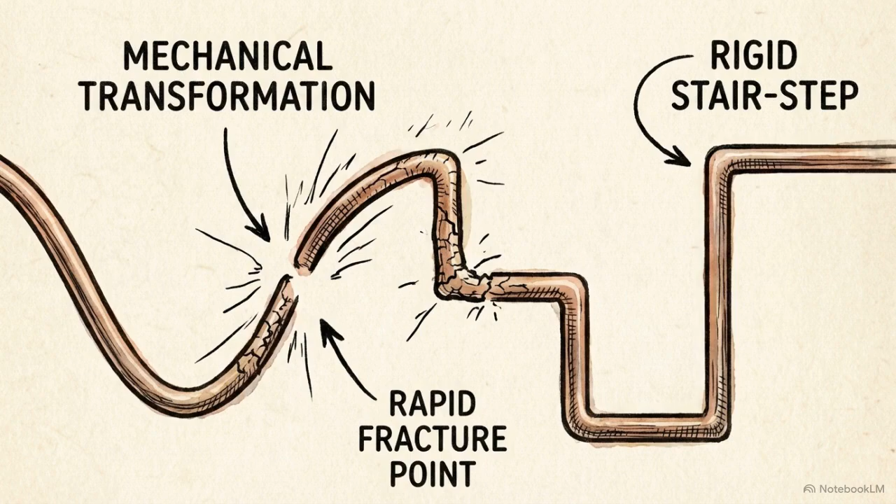Human mathematics is continuous. We count in tens because of our biology, naturally perceiving the world in fluid, unbroken gradients. But digital computing environments cannot rely on continuous values. Inside a processor, information snaps into distinct, discrete states. This restriction is dictated by the physical behavior of semiconductive switches.

Electricity is either permitted to flow or it is blocked. Voltage is either high or low, on or off. The base 2 binary system is the only mathematically rigorous way to map logic directly to this physical current.

Binary is structurally perfect for driving silicon gates, but for human engineers attempting to interface with that hardware, base 2 creates an immediate bottleneck. The resulting strings of ones and zeros are so dense and verbose that reading them, transcribing them, or using them for memory management introduces severe practical challenges.

To bypass this bottleneck, digital architecture relies on a mathematical abstraction layer, base 16, or hexadecimal. Hexadecimal functions as a high-density compression system, mathematically anchored to the processor's physical limits through its power of 2 relationship with binary. Scaling a system to address millions of bytes without its structural logic collapsing requires understanding this specific stack.

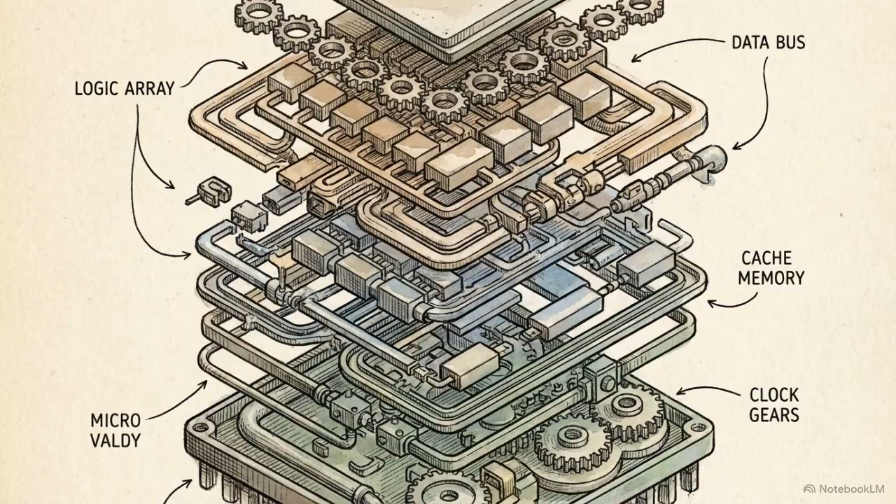We have to trace the architecture from the raw voltage of physical gates up through binary arithmetic and finally into the hexadecimal memory models that make modern software possible.

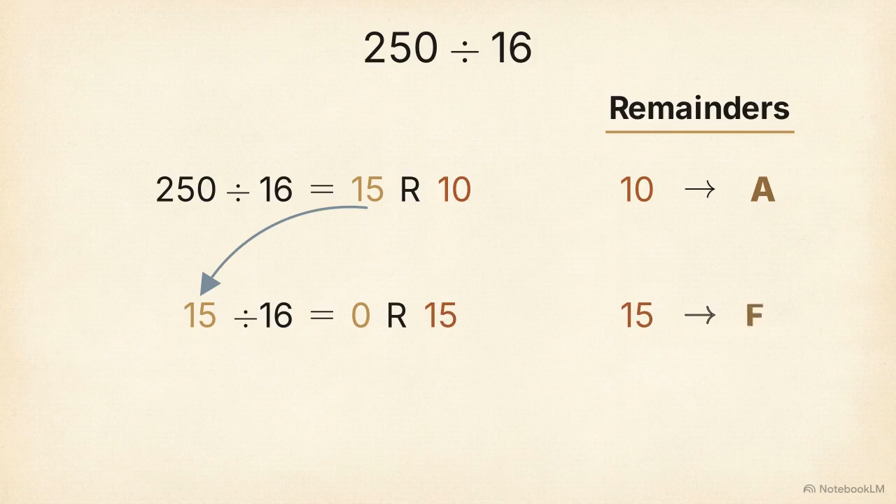We repeatedly divide the decimal value by the target base, either 2 or 16, and extract the new positional digits by logging the remainders until the quotient hits 0.

Reversing this process requires weighted summation. We map the binary or hex sequence back to decimal by expanding it into its power series, multiplying each digit by its positional weight and adding the results.

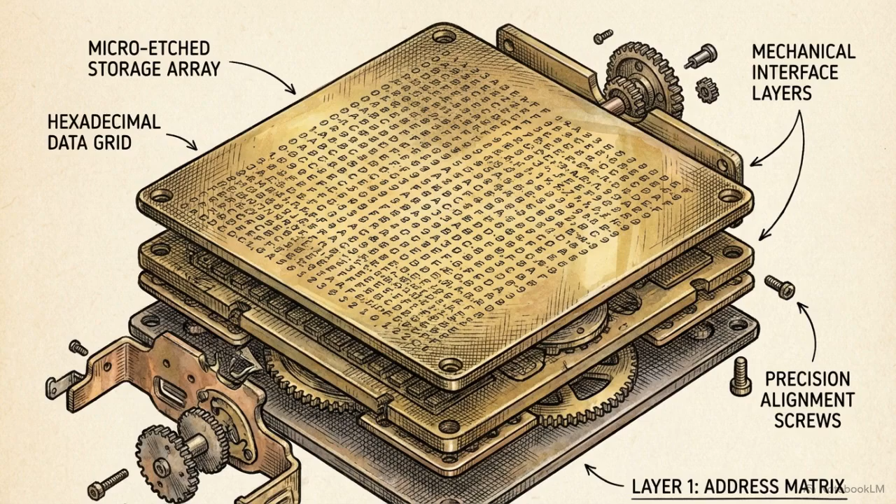1010 maps exactly to A and 1111 to F. This exact 4-to-1 direct mapping compresses data density. It gives programmers the ability to write dense memory addresses concisely, without discarding the underlying bit-level logic required by the actual transistor gates. Translating the data is only the first requirement.

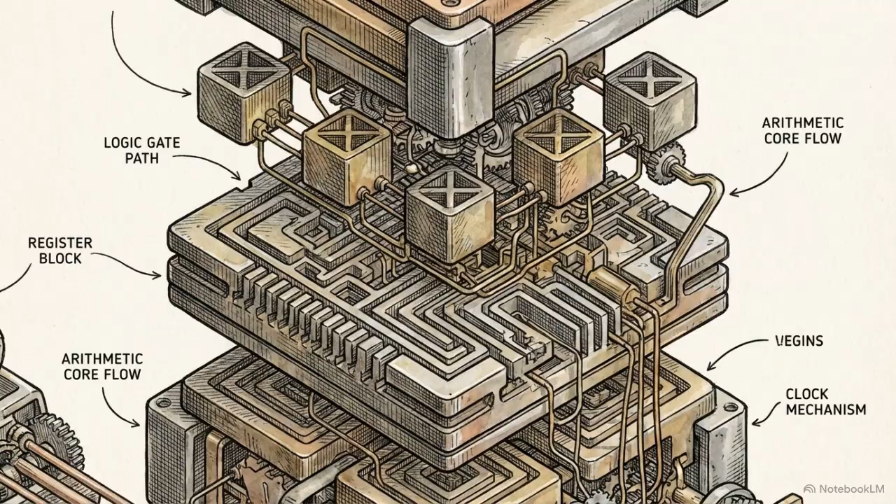The Arithmetic Logic Unit inside a microprocessor must physically execute calculations using those binary voltage states. Binary arithmetic follows rigid positional rules. The system relies on 4 basic states of addition, with the most critical occurring when adding 1 and 1.

Because the current column reaches its limit, the sum is 0, and the system is forced to carry a 1 to the next positional index.

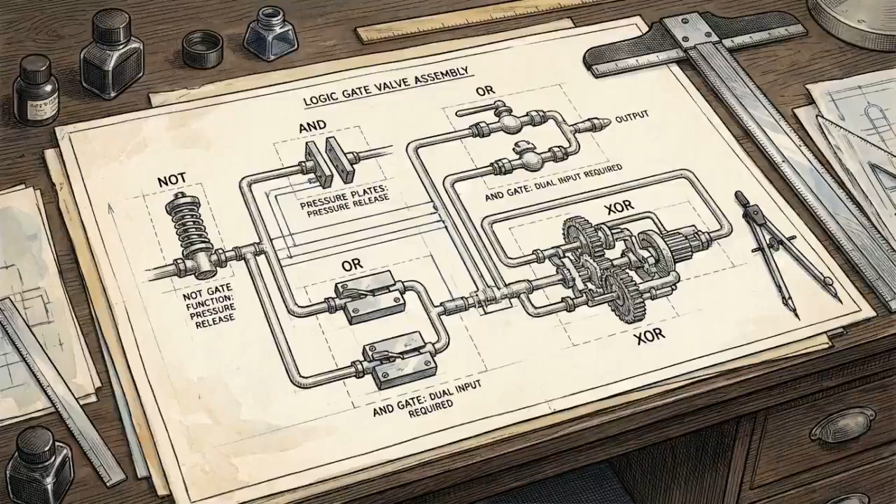Hardware architects instantiate these mathematical carrying rules physically using logic gates. Specifically, they arrange NOT, AND, OR, and XOR gates to permit or prevent electrical current based on their combination of inputs. This half-adder calculates the sum and carry of 2 bits.

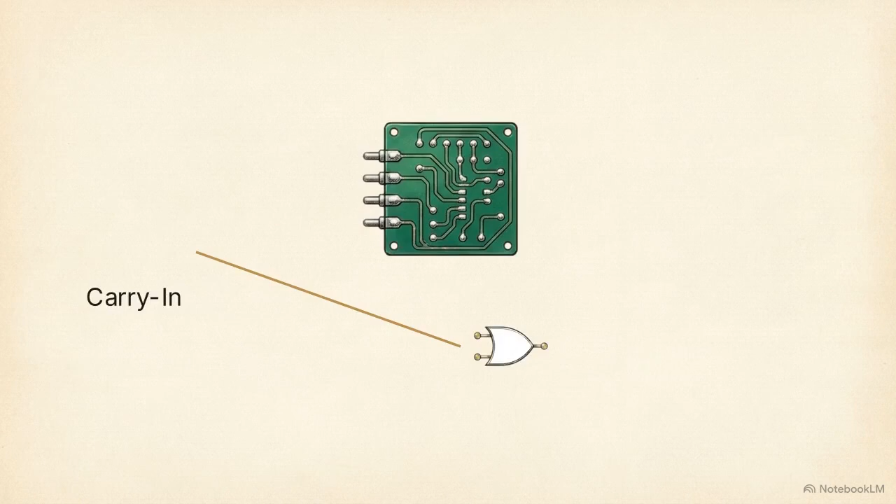Adding a carry-in, a third input creates a full adder. These cascade into a ripple carry adder, where the carry ripples sequentially to the next most significant bit.

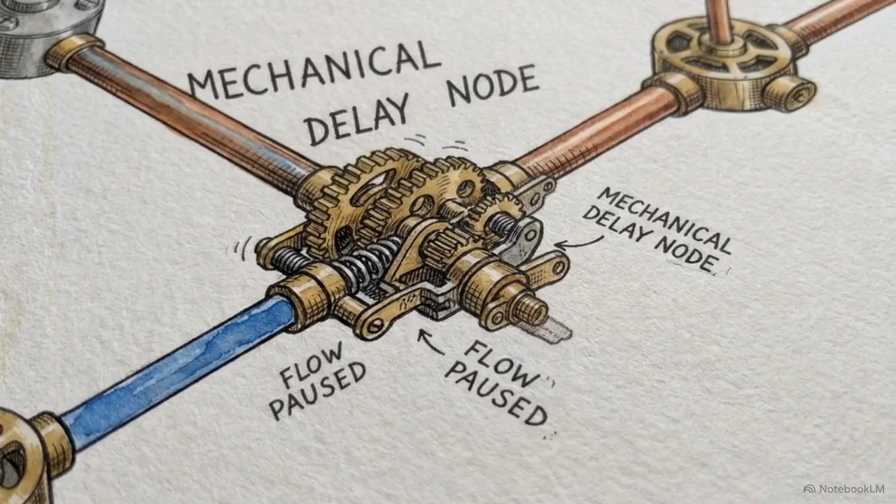That sequential ripple creates a physical delay. Waiting for a carry to traverse every bit severely throttles performance. To execute math at modern clock speeds, engineers implement carry look-ahead logic, adding predictive circuits that determine carry propagation in advance to bypass the bottleneck.

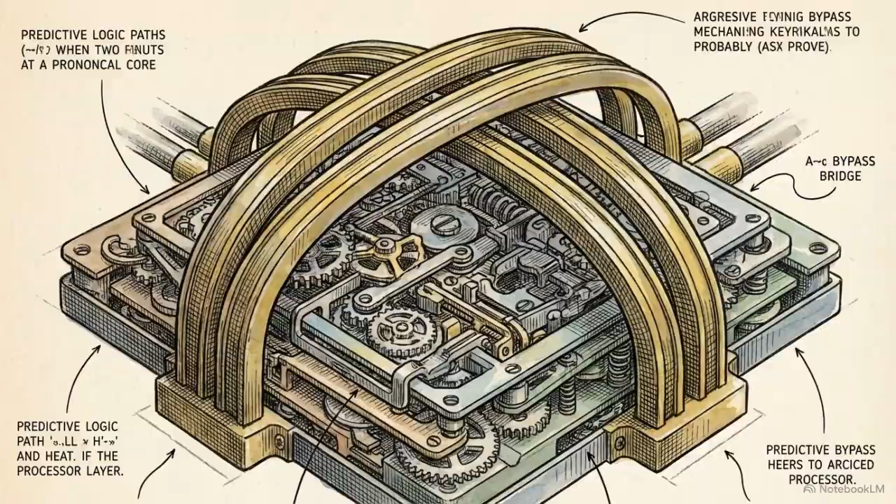Processing addition requires massive gate arrays, yet digital hardware rarely includes dedicated subtraction circuits. Building physical subtractors consumes extremely valuable silicon space. 2's complement manages negative numbers without a physical minus sign.

It first finds the 1's complement by toggling all bits. Then, adding a 1 to the least significant bit ripples across, forcing the far left bit to designate the sign.

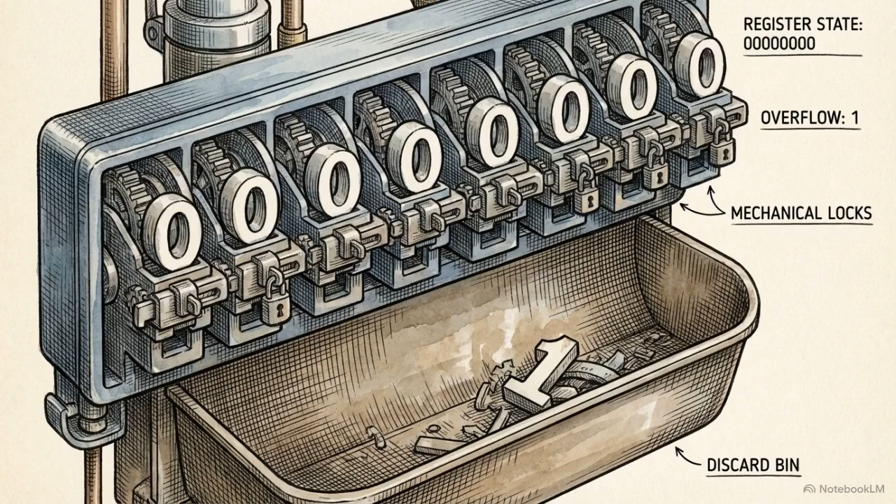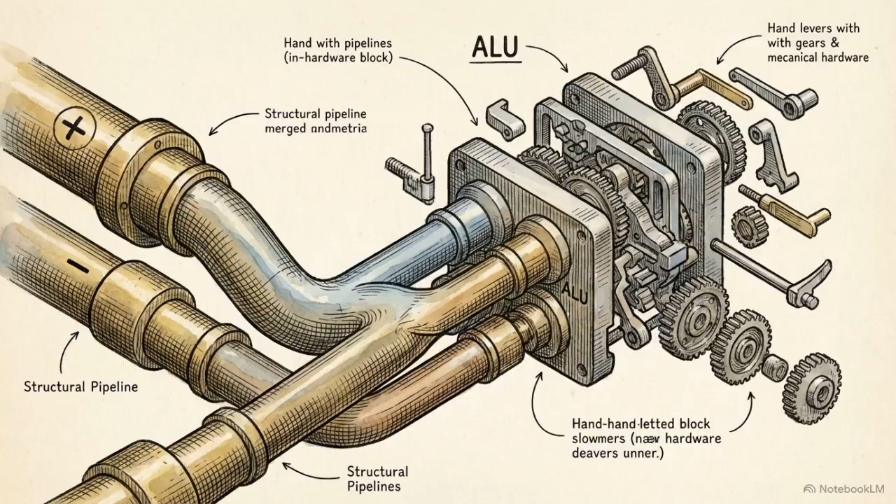2's complement solves 2 critical engineering problems. It establishes a single, unique binary sequence for 0, simplifying the logic. And it allows the ALU to execute subtraction using its standard addition hardware, simply by adding the 2's complement of the subtrahend. The trade-off for this arithmetic efficiency is an asymmetrical number range.

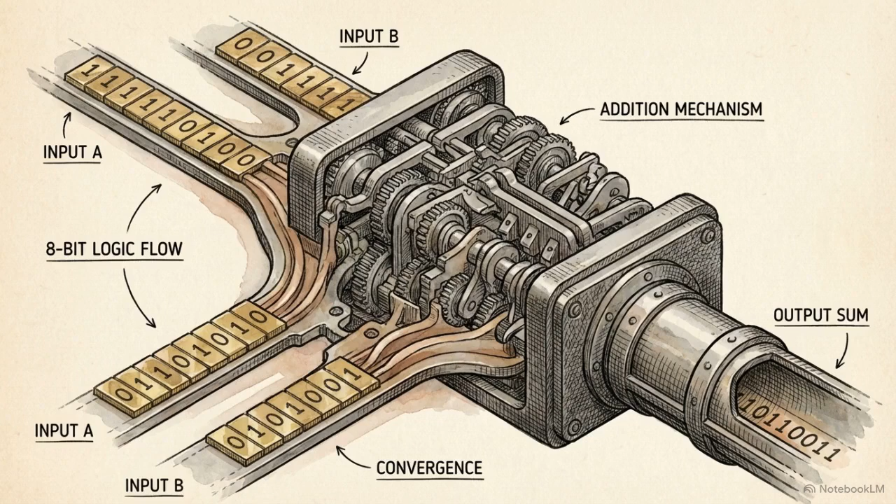An 8-bit system shifts from balanced to representing -128 through +127. Computer subtraction is an engineered illusion constructed entirely from addition logic.

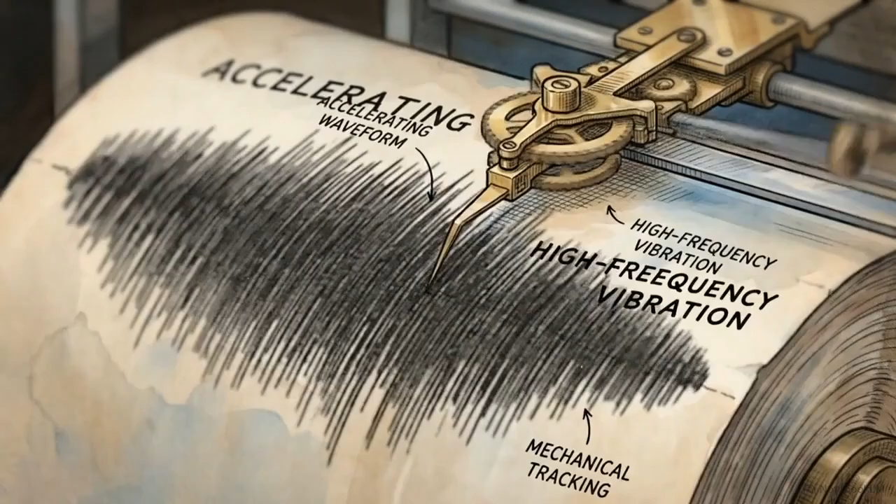Physically sliding the binary sequence left multiplies the exact value by 2, while shifting right instantly divides the value by 2. Developers simultaneously rely on bit masking to isolate and manipulate specific individual bits without overwriting the surrounding data.

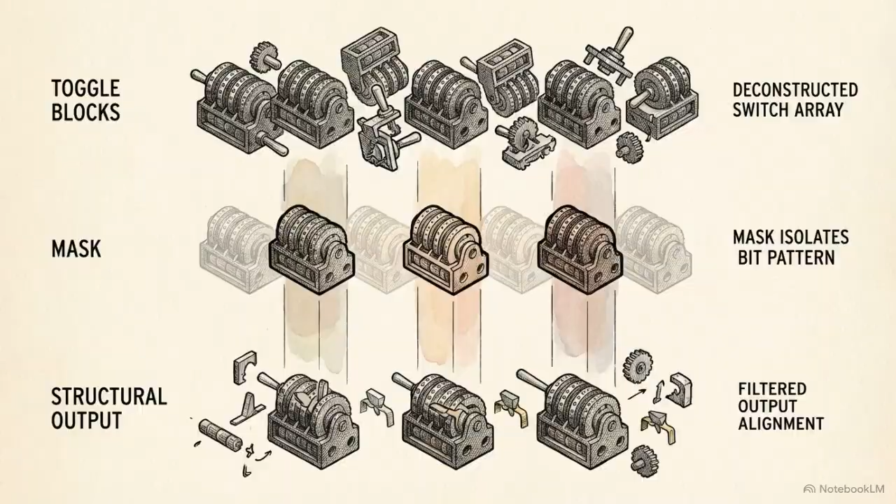A bitwise OR operation forces specific bits to a true or on state. A bitwise AND combined with a negated mask clears bits, forcing them off, and a bitwise XOR operation toggles bits perfectly from their existing state.

Bypassing the clock cycles required for standard ALU multiplication through immediate bitwise shifts and logical toggles provides a significant speed advantage. Operating data as a direct map of physical toggle switches yields the extreme throughput required for performance-heavy tasks like high-speed cryptography and real-time graphical rendering.

Early 16-bit processors had to address a full megabyte of memory using registers that were far too narrow. To solve this, a 16-bit segment address shifts left by 4 bits, mathematically multiplying its value by 16. A secondary 16-bit offset drops in and adds directly to that shifted segment. This compound logic cleanly outputs a 20-bit physical address.

Modern network architecture requires drastically wider addressing spaces. The IPv6 standard relies on 128 bits. Since parsing a string of 128 individual binary states is functionally impossible for human engineers, base 16 hextets become an absolute necessity for global routing infrastructure.